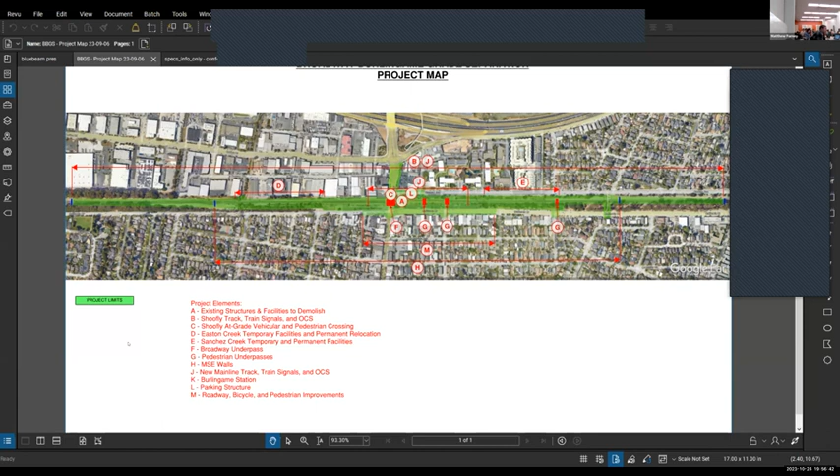And then when we submitted it - if you could click to that, yeah - this is what the pro put together. So this is what we submitted as one of our pages, with all the information that kind of goes with it. So it's just a quick and dirty way here - here's what I'm looking for in the proposal, make this pretty for me, right?

I'd imagine - why do you guys use Bluebeam for sketches, markups, stuff like that? So that's super useful. If you don't use it for that, if you can start to get used to some of those tools, that's super useful.

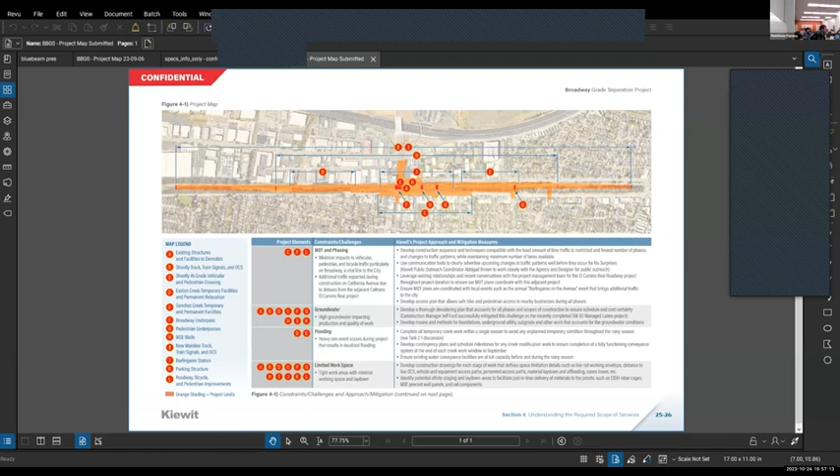All right, now I'm turning over to Garrett. That's my only two examples. I had two other examples, but he's got better examples of what I was gonna talk about, so I'm gonna let him cover it.

All right, so you guys are going through, bear with me, and you're learning all the markup tools. So when you're working on a project, you use Bluebeam to just convey simple messages. Like just this drawing right here where we had specific lengths of wood that were for specific locations, and you could just highlight the drawing and say, I want this 9'10" long 4x4 right there. And your crew can cut a bunch of 4x4s at a certain length, and you could just quickly highlight something in Bluebeam. So it doesn't have to be pretty, it just needs to be effective, and that's just what we do when you're on projects - you just have to pretty much get the job done.

Garrett, do you have - is this an example where you actually use the measurement tool? Yes, we would have done that. For this specific one, we would have scaled. Typically, when you're on a project, you're not scaling - you are using hard dimensions that the engineer gives you. But for false work, this would have been scaled.

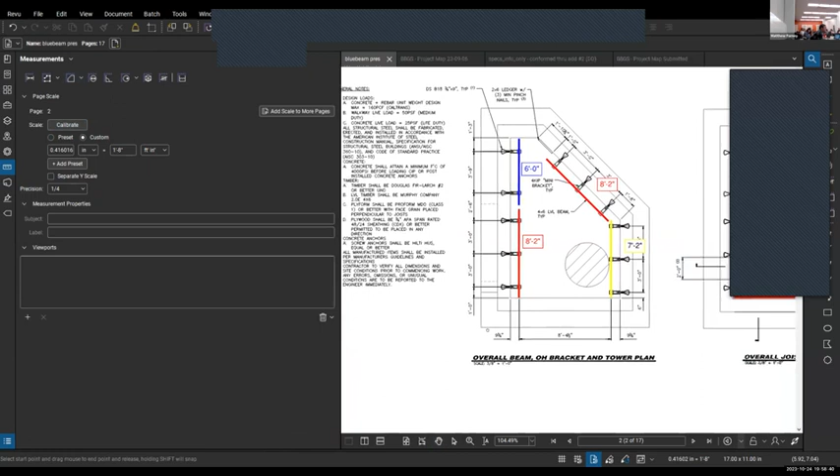So is that something that I guess you guys have gone over? Can you show them how to? You guys use the measurement tool quite a bit? Yeah, I would imagine, right? Probably that's one of the main tools you guys use. So you want him to show you, or are you good? You good? Oh, we got some new users though - have you guys used the measurement tool?

All right, Garrett, fire it up. You're on the spot. I hope I'm right, don't mess it up - boom, nailed it. Okay, now show them what you did.

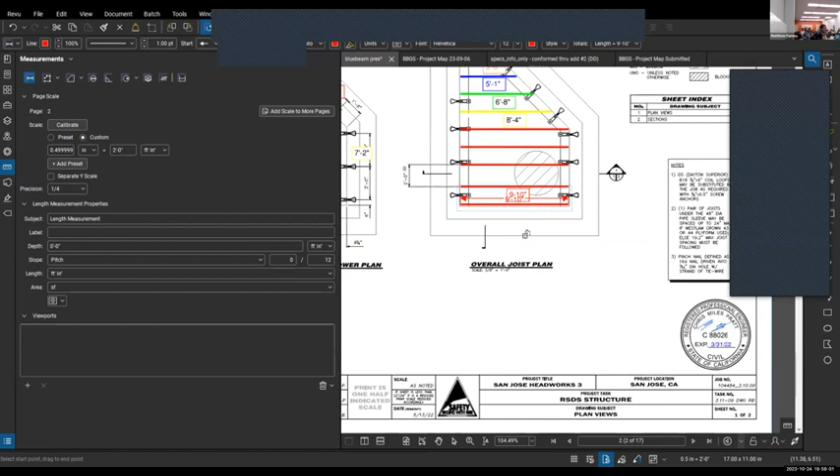The person who drew my false work drawings back in the day didn't provide lengths, he just drew them in. So for all these 4x4s, we scaled them off the drawing and told our crew to cut them. We probably shaved an inch or two off, just to make sure it fit. But yeah, we just scaled.

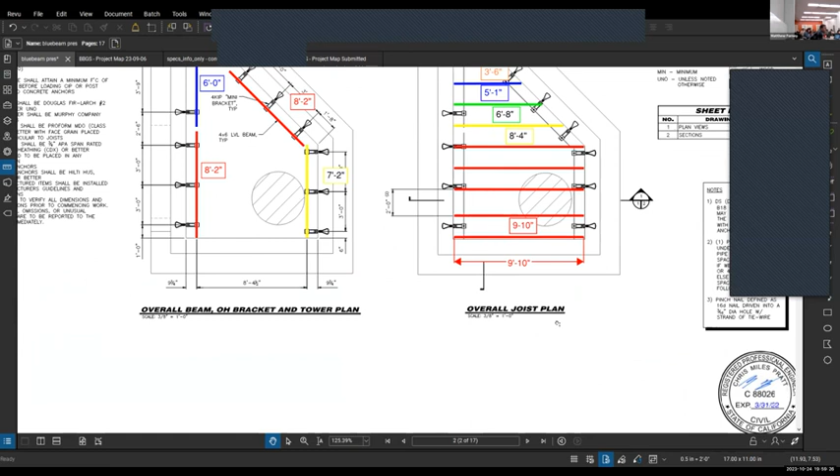So show them how you use the measurement. Oh sorry, you got to calibrate. You can either choose a scale at the bottom or pick a dimension. So you got one foot right here, click one to one, put one to it, and then pull your thing, and you can just scale across.

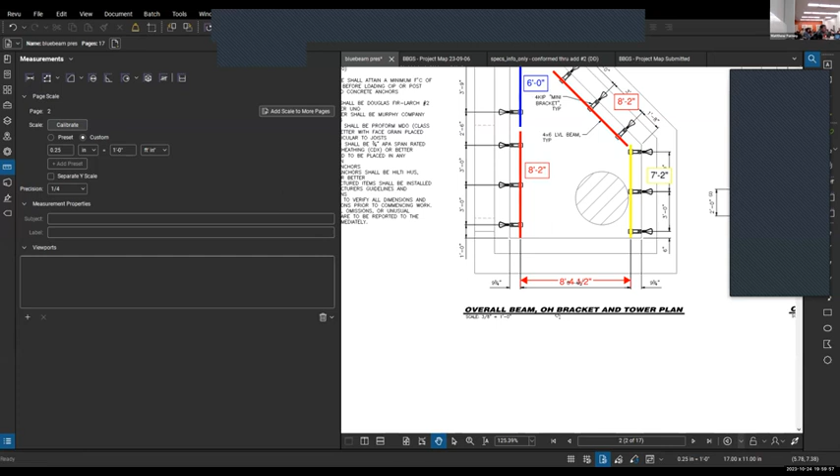Something I like to do after I calibrate, I pull a measurement that's shown, so you know it's calibrated, right? Make sure the drafter didn't mess up somewhere. Believe it or not, that happens. And then just go for it.

So you know how when you're doing the measurement, you got a faster way? Yeah, and it's snapped right onto the line. How do you get it to do that? There's a snap button right here. I've seen some of us just zoom in all the way to try and get it precise instead of using that. If it's a scan drawing it won't work, but if it's a computer generated AutoCAD PDF, you can snap to content.

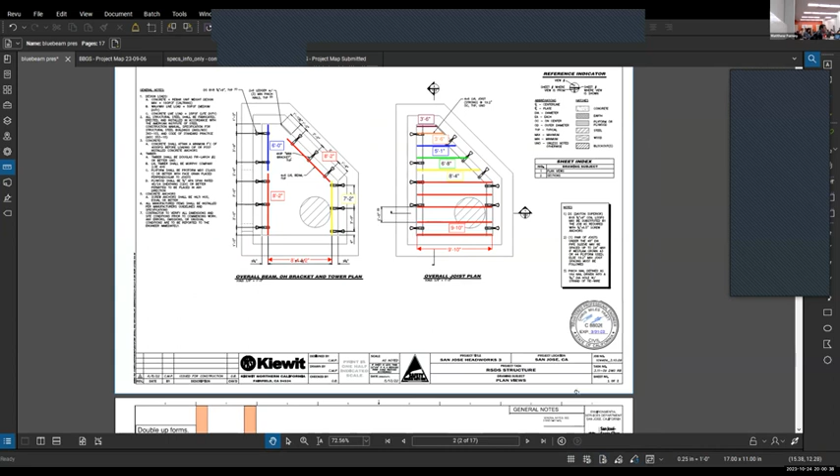There's also snap to grid. Where's that function at? Right here, snap, top right, bottom left. So if I turn it off... where's your thing then, you don't see it? Oh there it is. Oh man, you can't see it. Oh bummer, this thing's covering it up.

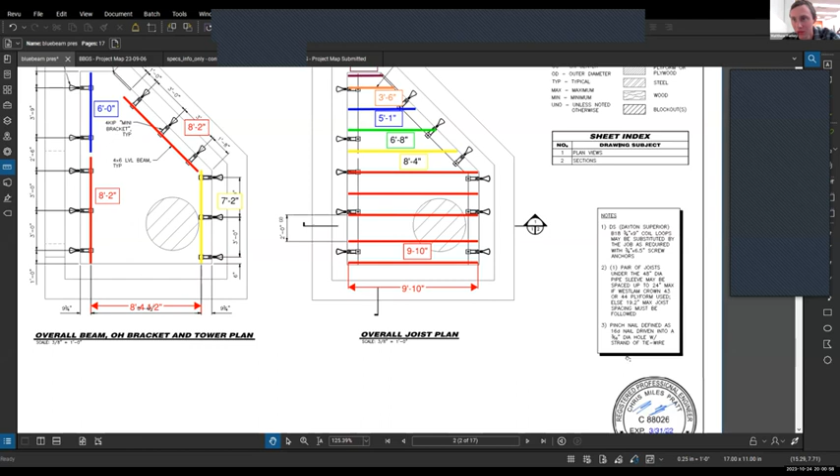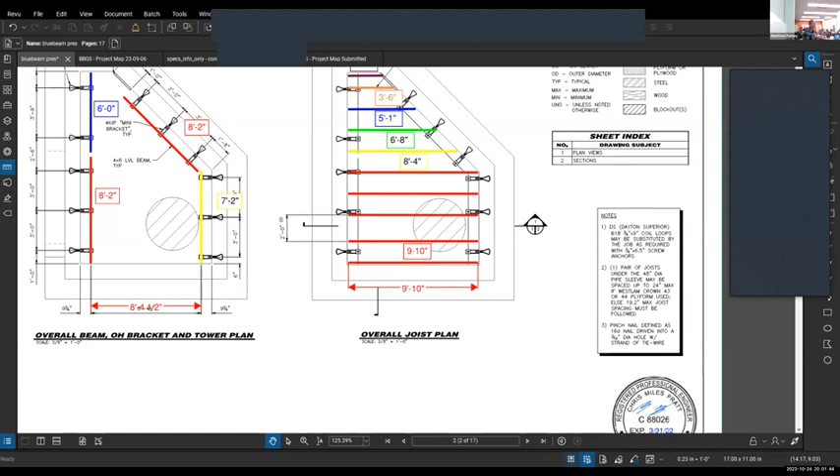You said it was snap to grid or? So at the bottom bar, you have a couple different snaps. You have a snap to, you can show the grid like I'm showing right here now, and you can snap to whatever that grid is. I never use this. And then you have a grid you can pull up, and in a perfect world it'll snap to it. Then you have a snap to object, and you can just pull it around as needed.

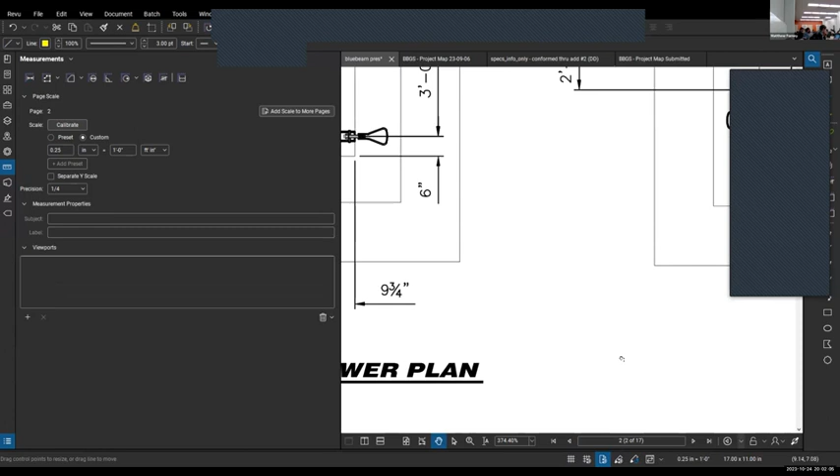Next time you're on Bluebeam, take a look at the bottom right. If you go to view in the black ribbon, you can change it there too. In the top ribbon it says Revu, file, edit, view, the drop down ribbon. You can change it there, or you can snap to your markup if you wanted.

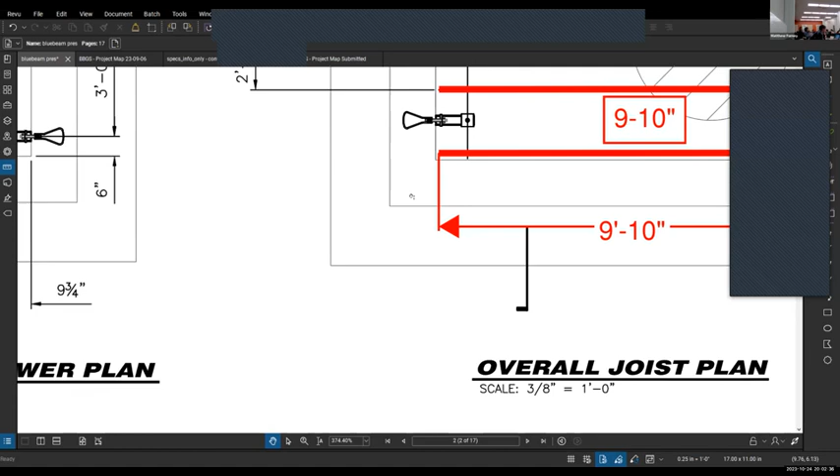Okay, thank you, learn something. I did, I told you I'd learn something today.

All right, I won't be long-winded. There's a couple things I think are the most beneficial, but you guys are learning how to make boxes and change their colors. So combine all those skills, learn how to sketch things. You can convey semi-complicated designs that you want people to build.

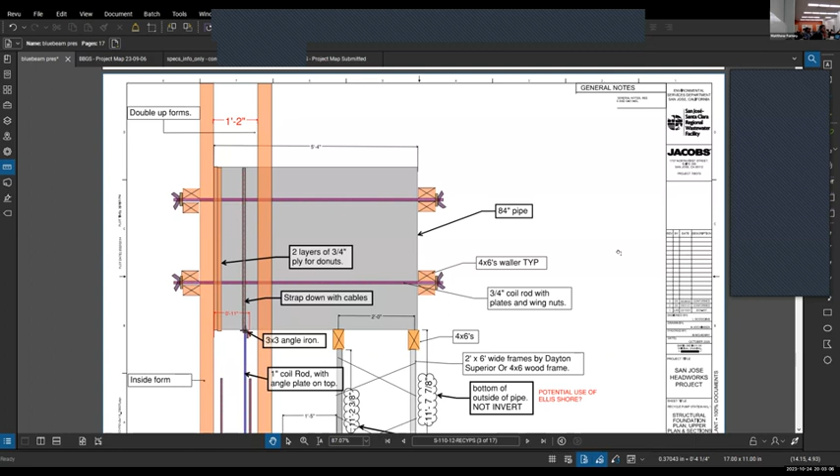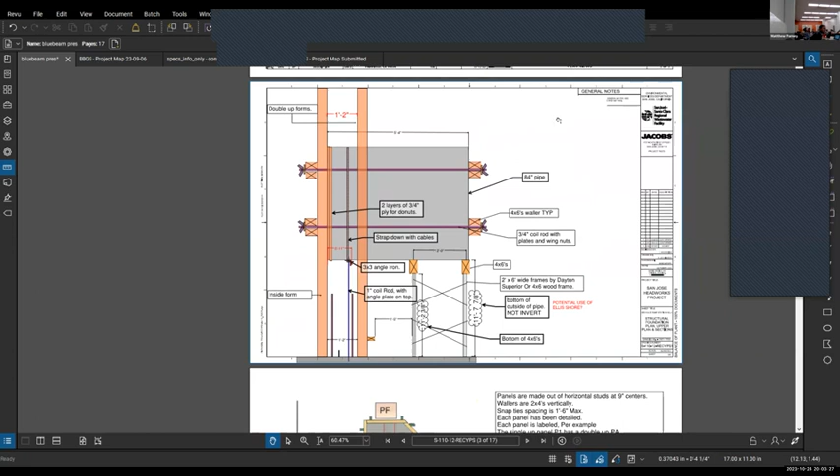Believe it or not, my foreman, who was 70 years old, he drew this. So if he can do it, I think everyone in this room can do it. This was 2 forms that held a pipe, and this was just used to convey the concept to his crews. So just simple sketching, fundamentals, and a little bit of understanding of how things go together, you can make decent drawings. And then we just use Bluebeam to identify where we want our forms to go. Really, it's just sketching.

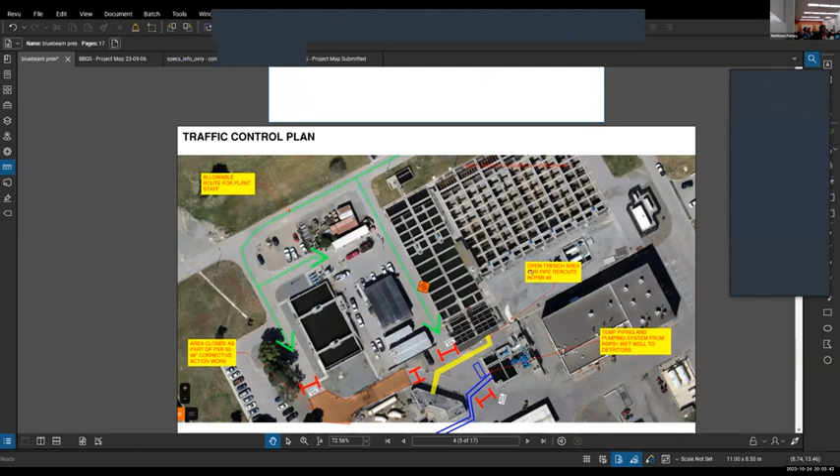Any questions on any of this stuff, as far as how we did some of this? Just drawing boxes. I don't use, I probably use AutoCAD a little bit more personally, but I use Bluebeam a lot of the times. So this is another thing.

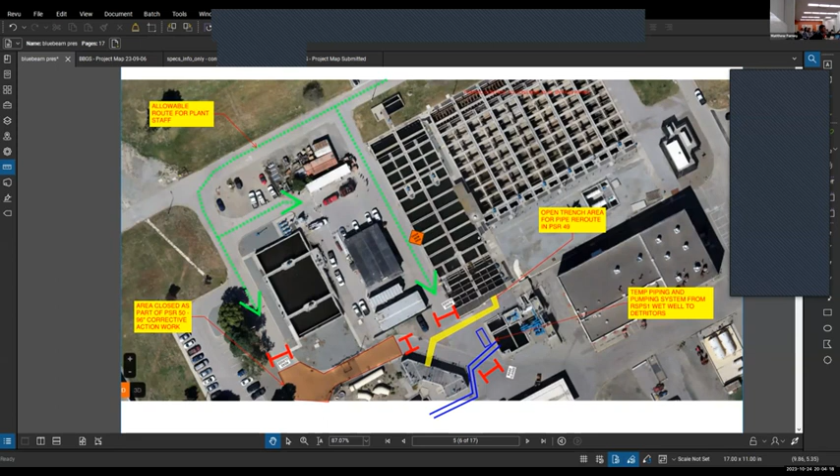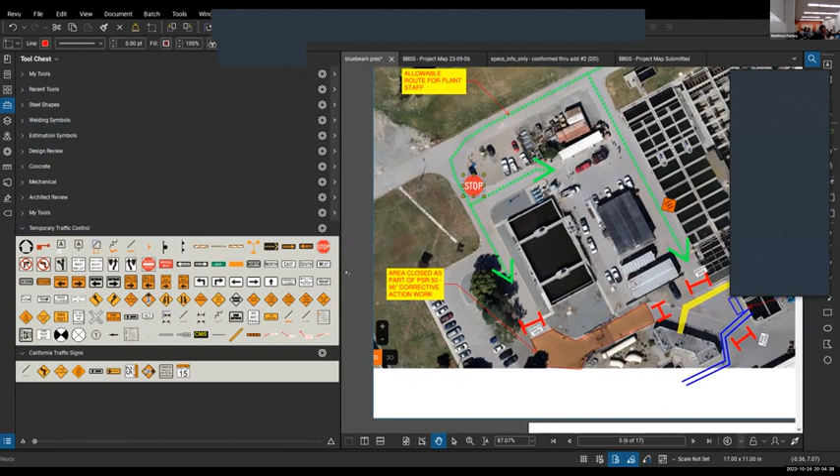So I have this map where we had truck routing, and have you guys used tool palettes before? Who has used tool palettes? Okay, so probably don't have enough time to go into a lot of detail on how to make tool palettes. There's probably a lot of Google information out there, but the power of tool palettes is you can create your own, and make a stop sign that you throw onto your map and say, hey, I need you to put a temporary stop sign right there at that intersection, or maybe a do not enter. And you just throw it in there. So it's this little tool chest right here on your guys' ribbon.

These are a bunch of custom ones. I have a different profile for when I'm doing structures work. Are these all preloaded? Not those signs, those were made by Northern California. But you have structural members. This comes with it, there's only a handful of members, but you can make your own.

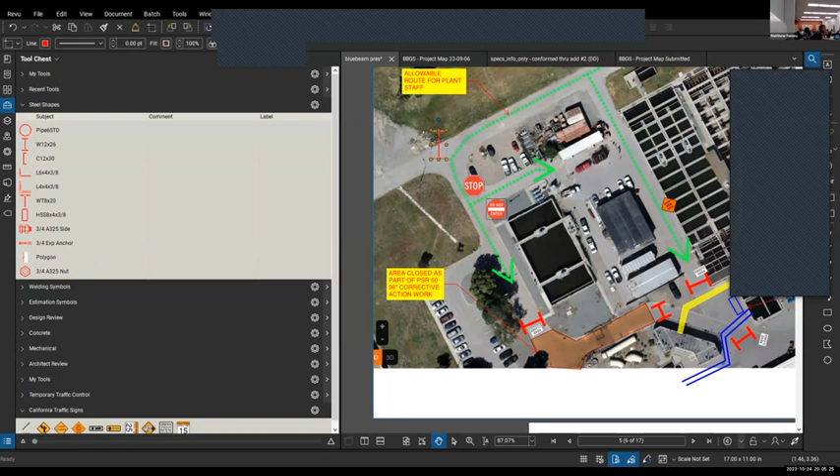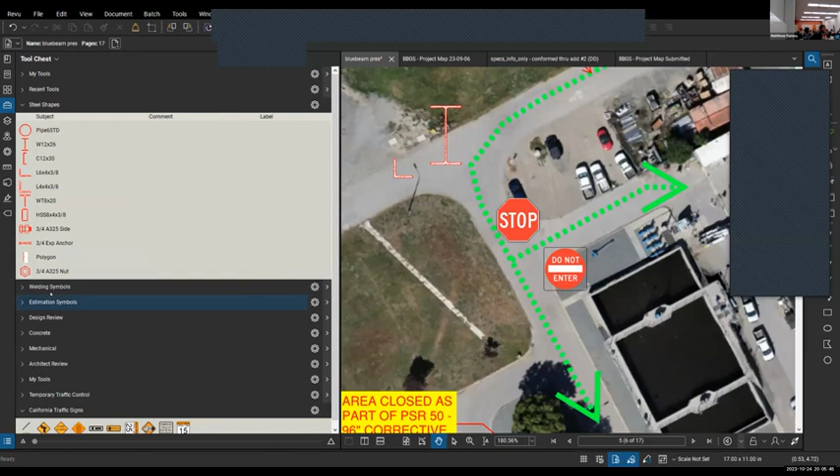Tools that you're going to use often. If you're doing structural steel and trying to convey messages, you have a bunch of options. Maybe the company you work for has made them for you, or you make them yourself. Welding symbols would come in real handy for fabrication work, so you can throw your weld on there.

We do a lot of maps with temporary traffic control. So one of the most beneficial things I can think of with Bluebeam is quantity takeoffs. Have you guys done a quantity takeoff before in this? Bluebeam is amazing when it comes to quantity takeoffs.

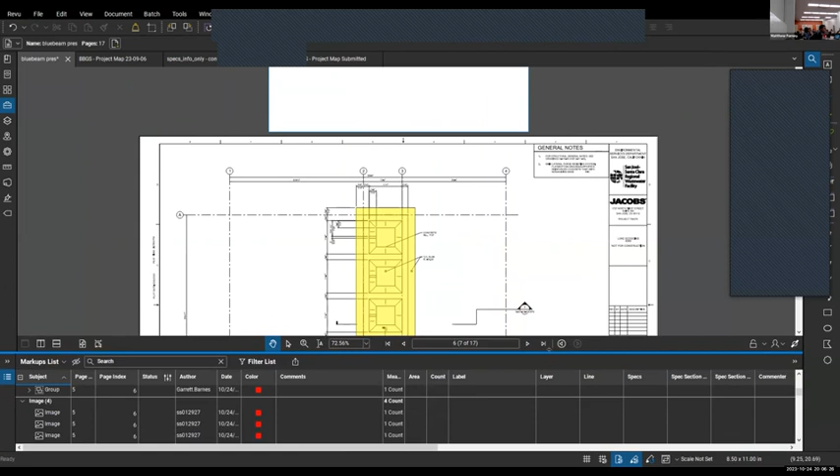You can track everything using the little spec review he showed. You can track it that way. Every company is a little different. At Kiewit, we have a tracking sheet on the side, but right here, this is a real life submittal we submitted to the city of San Jose, and this was at 60% design, so the drawings are only 60% of the way there.

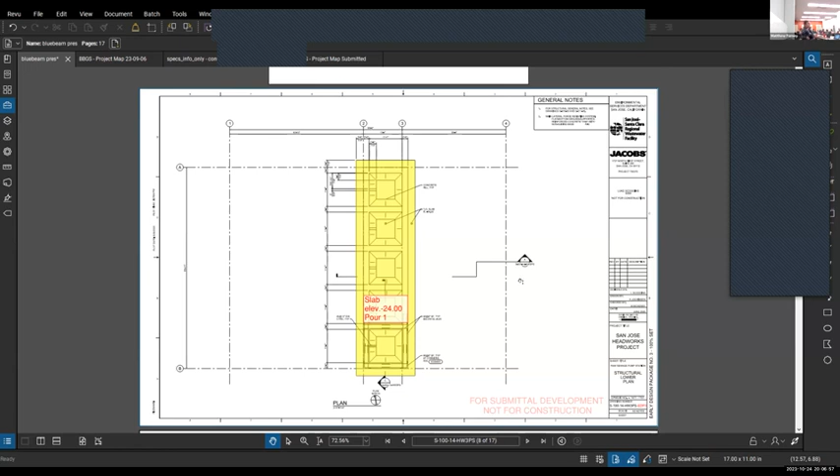They're a little confusing drawings, but what we submitted was every concrete placement for the structure. We identified the concrete placement and gave it labels, and it can be very simple, it doesn't need to be complicated. For this structure, it was pretty easy to do a quantity takeoff using numbers and not having to use Bluebeam.

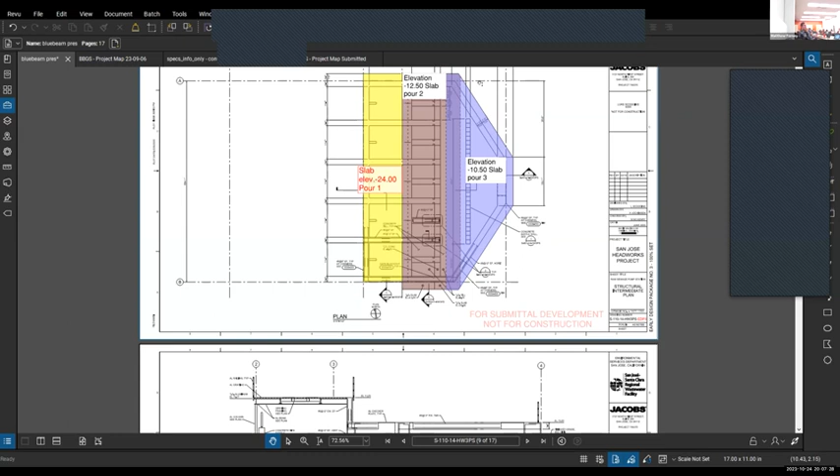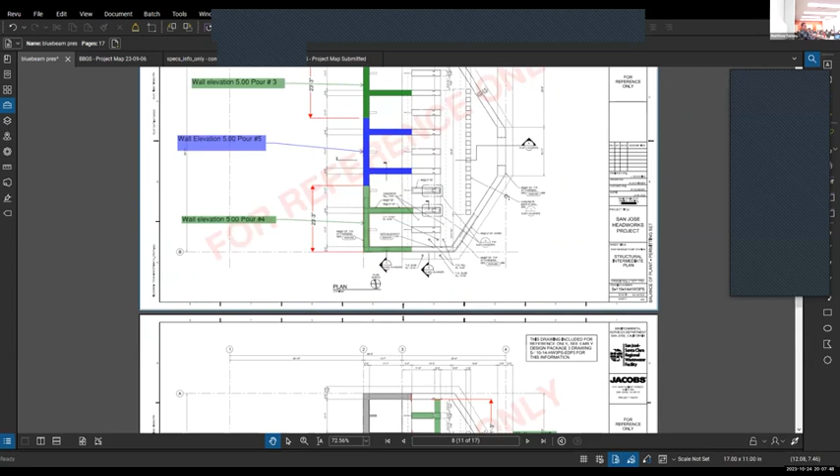But for this pour right here, where you have what do you call that, a rhombus? I don't know. You would probably want to use Bluebeam to trace that to get your area and volume for your concrete. So we use Bluebeam to identify all of our concrete pours. Whether you use Bluebeam to get your square feet, linear feet, areas, volumes, that's to your discretion, but we put everything into a tracking sheet to track all your quantities.

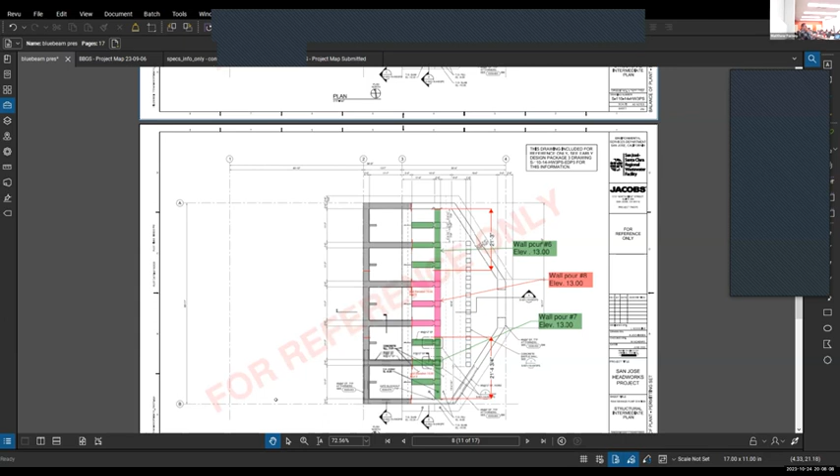So we have our structure, we have each individual pour. Oh man, give me a sec. Come on Matt, gotta let me know. All right, so we're still tracking on side sheets, but we have our structure name, our individual pours, and the quantities associated with it.

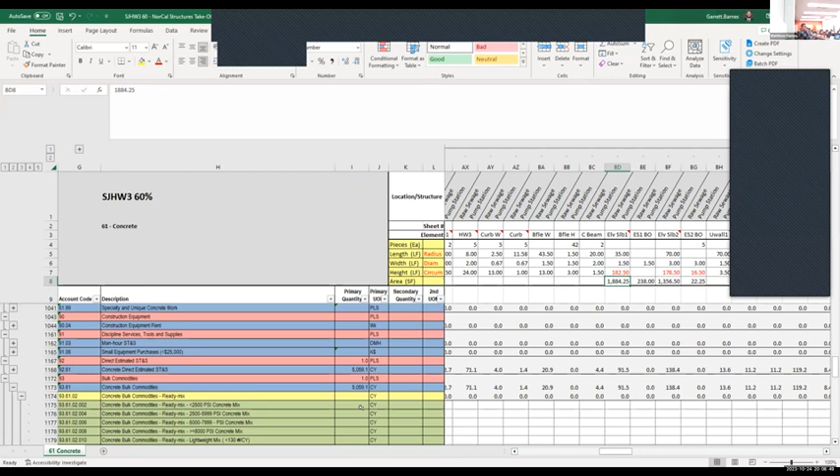If we use Bluebeam to get anything like this elevated slab number 1 with this area and square footage, that was probably taken from Bluebeam. So we identify things in our quantity takeoff that were not done by math, we use the program. But we use Excel to keep ourselves organized. There's a lot of quantity takeoffs we can do within Bluebeam that make life a lot quicker than it probably was when Dustin was doing estimate takeoffs 20 years ago.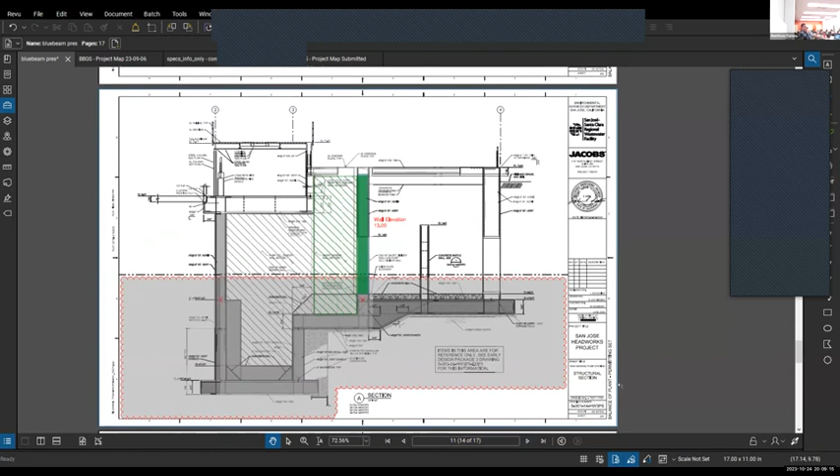I was telling Dustin, even in 2012, my first takeoff was on a piece of paper, we had to do everything by hand. This was our submittal package that we submitted for all of our concrete placements on this given structure, and this was a picture of the structure as it was being built. Any questions on takeoff?

Has anyone done a Bluebeam studio session? Oh yeah, what? All right, so this is the best feature of Bluebeam that I can think of by far. Let me open one up. So you can find your studio sessions.

A studio session is essentially a shared Bluebeam file that everyone can work on. So I am currently, oh gosh, no, I gotta sign in. Oh, no, I'm signed in. So I'm currently design build manager on a progressive design build. I have a construction team and a design team. The design team is currently working on 90% drawings.

So when those become available, rather than having a bunch of bootleg copies of the design that we all mark up, we have one file that's shared. We can all go in there, log in, track our markups, and it'll track everything for us. Then we can spit it out into Excel. So let me find my master set really quick.

You've got to get everyone to sign a non-disclosure agreement before I show them this. So this is our current 60% design. It'll take a few minutes to open up since I'm not on the Kiewit network.

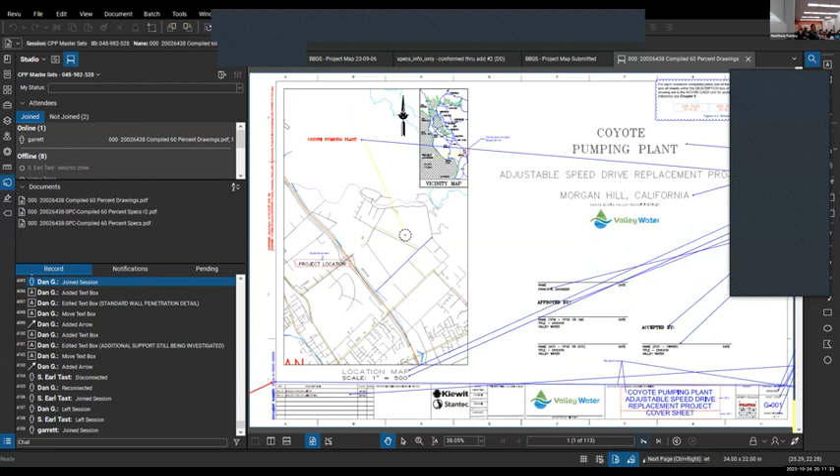Give me a sec. So here's the design. We're at 60%, so obviously it's not a pretty design. So we go through, and when we see problems, we mark it up. There's 113 pages, so you can see every time someone marks up the page, you can click on the markup.

And you can be like, who's this loser that said this because they're wrong. You can find their name, if it'll ever do that. Pretend like it's opening up. There it is. So you can be like, Joel Ewald doesn't know what he's talking about. Or you can see his comment. He can put it off to the side and you can respond.

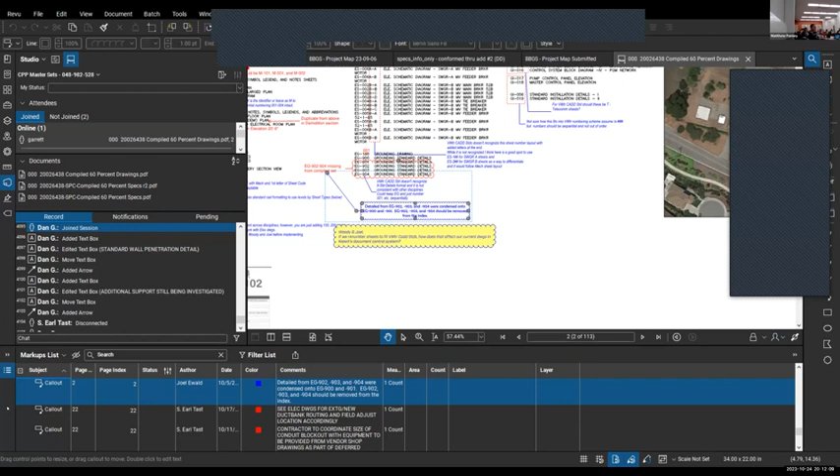You could also take this grouping, depending on what you have for your columns, and spit it out in Excel and have a comment log that you can track on the side, so to keep yourself organized.

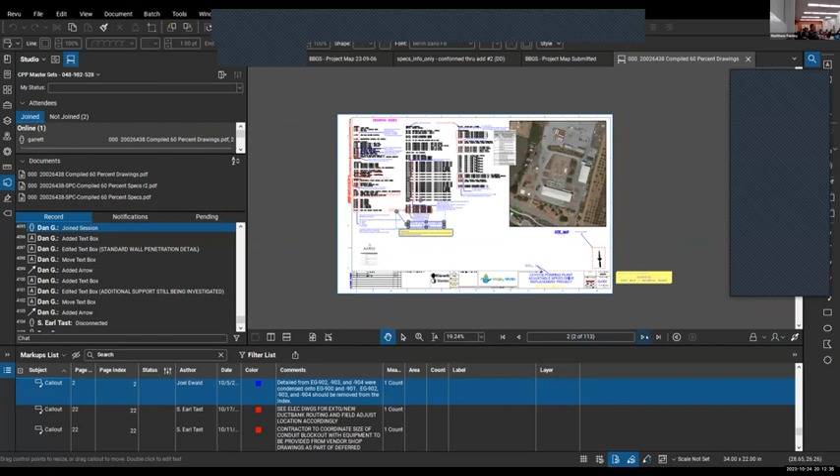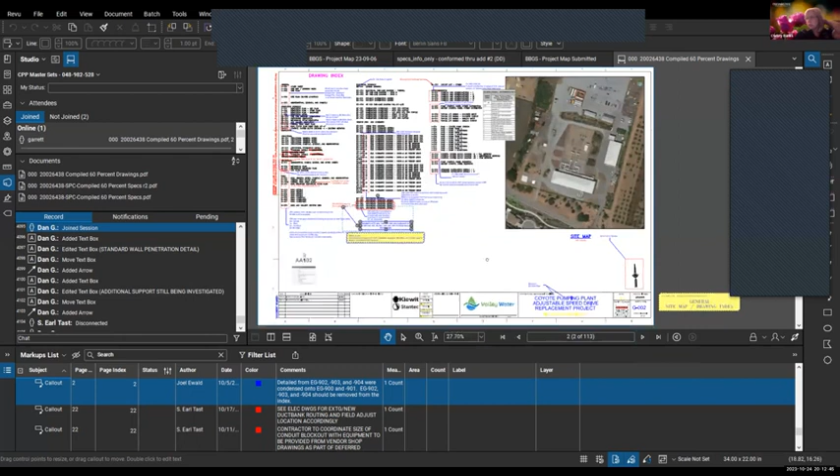But it's a lot better to do a shared Bluebeam file than it is to have 50 individuals each commenting on a different file. So this is my favorite feature of Bluebeam. If you haven't dealt with a Bluebeam studio session, I'm not sure you guys go over it in class at all. Yes, Garrett. So we're actually using the studio session in our 150 heavy civil or commercial building class.

And we also use it on the commercial building team as well. I think this is a super important one, because I was just talking about how many clients are going progressive design build and CMGC. I've done comment resolution on design where everybody puts their comments on a separate file. It's so hard to keep it organized. You generally drop comments. This is something for sure, if you've never done this, you're gonna want to figure this out.

That's the last one I have. All right. Well, I think that's all we had.

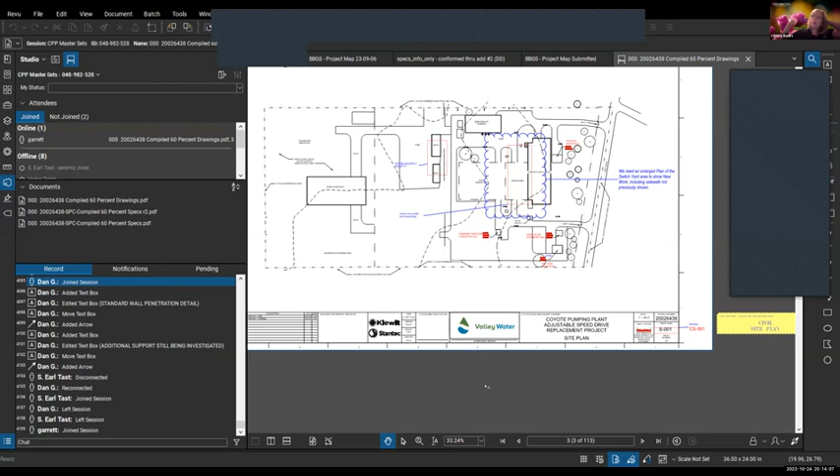Go ahead, Christy, can you talk a little bit about how you might use it. I'm nothing against you guys, but I am the commercial building team advisor. And so we do a lot of site logistics plans, site utilization plans. What's the difference?

Doing a staging plan in Bluebeam versus a site utilization plan? And maybe you could just kind of describe how we could use Bluebeam in a heavy civil sense for kind of the same kind of thing, but you guys obviously use it as a staging plan versus like a site logistics plan or a site utilization plan.

Just to give you some perspective, on building jobs, a lot of times what they'll do is, when they mobilize, they'll have a mobilization plan, and then they'll have phasing within a particular building, like maybe a crane plan, and then they might have their structure plan, and they go through and may do overlays for phasing. How would you do the same thing for heavy civil work?

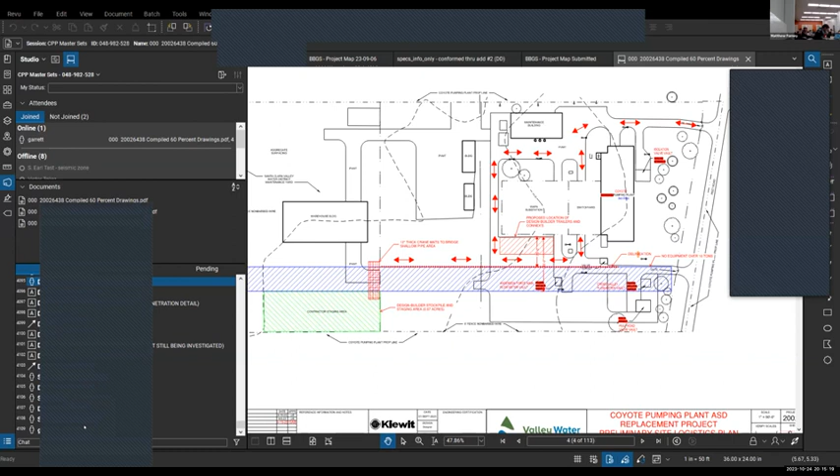Bear with me, I got one. I was gonna say that's a loaded question, huh? This Phillips 66 job that I was on, we did exactly what you just talked about, Christie, where we had, hey, this area is gonna be laid down for the first 6 months for structural steel. And then we'll get in there and build the foundation for the actual structure that's gonna go there. And so each phase, we had a separate staging or lay down plan, if you will.

Yeah, it's a little different. The students that are here, the plans for building construction versus say a highway job, or some kind of linear type job is going to be a lot different. The plans are a lot different than say a building job. And so the staging, the thought process behind it is going to be different for heavy civil than it is for, say, a building construction job. But you guys might still do the overlaying and such too.

So I'll just share this really quick. And Garrett, you're not sharing, I don't think. Yeah, I just flipped over. So this was something I put together for an estimate for the same project.

It's a pretty simple scope, but to convey the message I had for my boss, I identified in red the objects that were to be demoed. I overlaid it with the new construction, shown in yellow, orange, and blue. So that's a bit of a phasing plan, so to speak. I don't have any good examples at the moment of phase 1, phase 2, phase 3.

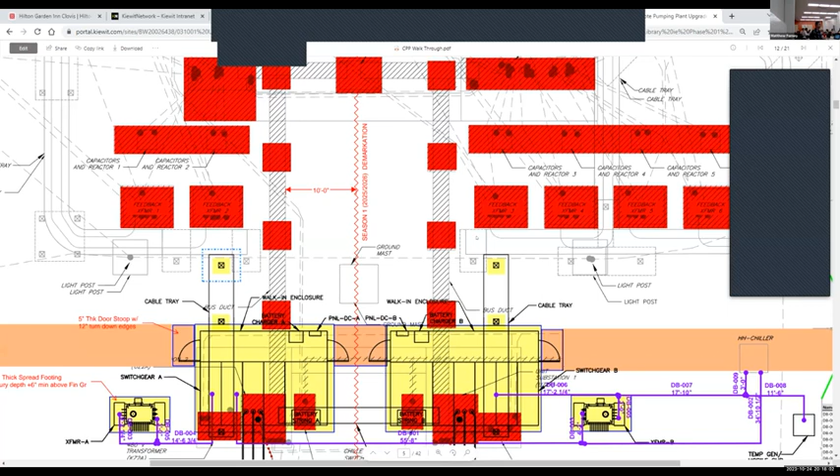Anything else? When you do the logistics plan, what reference photo do you use, or do you use the plans? You can use Google Earth, you can use site plans. It just depends on where you're at and what's needed at the time.

And Garrett, say you're doing a linear project, not a full pump plant replacement like this, say a big highway job—I'm trying to think of the highway job, oh, the 101—do you typically on a heavy civil job set up your lay-down areas at different spots, or do you move them?

Depends on the job, but you would move them. You would move them as needed throughout the phasing. And then would you set up a plan for each of those moves or stages you're working at? Yeah, at San Jose we had multiple phases that changed where our stockpile was. We had like 5 or 6 different drawings that showed whatever phase we were in for any given window.

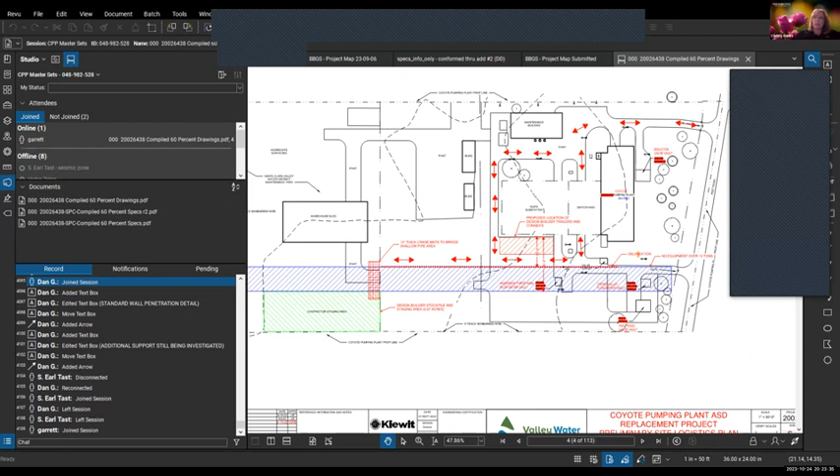And when you have a big job like that, when you have to get, say, a vendor or subcontractor to bring in that material, do you bid that out or do you just call them up and decide who you're going to use? You bid it out, and then...

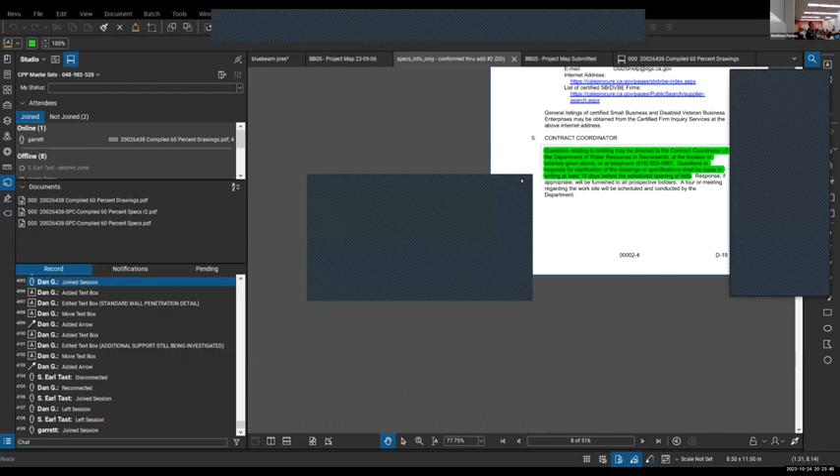You bid it out. Although I would add a caveat that we've got enough experience in the Bay Area that I'd say service varies based on where you're at and the supplier. So on a recent project, I paid a premium for concrete and for my reinforcing, my rebar furnish and install sub.

I paid a premium for both of those subs because I knew I could trust them, and schedule is absolutely critical. I couldn't take the risk of having a concrete supplier that maybe would deliver - run concrete out of spec, out of fly ash - or an ironworker sub that goes out of business. So sometimes you do want to pay a premium to make sure you get the service, to make sure you get the quality that you need.

Depends on kind of what's driving the job. Not all concrete vendors can, for example, provide the concrete that you need at the quantities you need and how often you need it. So we may just limit it down to three competitors. But all concrete pours get a map of where the pour is going and we have a route for it, so we don't have any hiccups, and we use Bluebeam to make it.

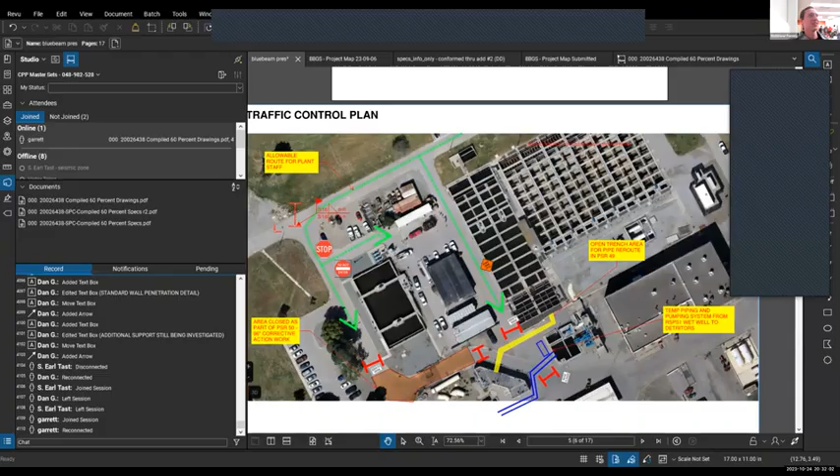Hey, Matt. We had our what's coming up slide. Everybody, hold on. Hey, yeah, I messed up, don't go. Do you want to stop screen sharing real quick? Yeah. Hold on, Matt, maybe you could do a little plug for everybody.